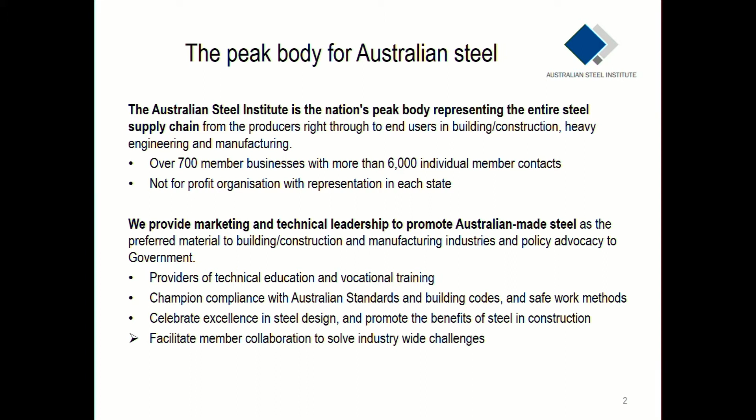Under normal circumstances, this is very difficult because the provisions of our anti-competition laws mean that competitors can't really come together and pool resources, but that's what we're in a position to do. I'll probably state the obvious here, but steel's a very important material. Steel, due to its fundamental physical properties, is a very versatile material, and it is used in, or fundamental to, most aspects of our modern society and the economy that supports it.

This applies both to long-standing traditional industries such as building and construction, and also to more recent industries such as renewable energy generation. Think of wind towers, turbines, frames and support structures for solar panels, and even platforms for wave power generation.

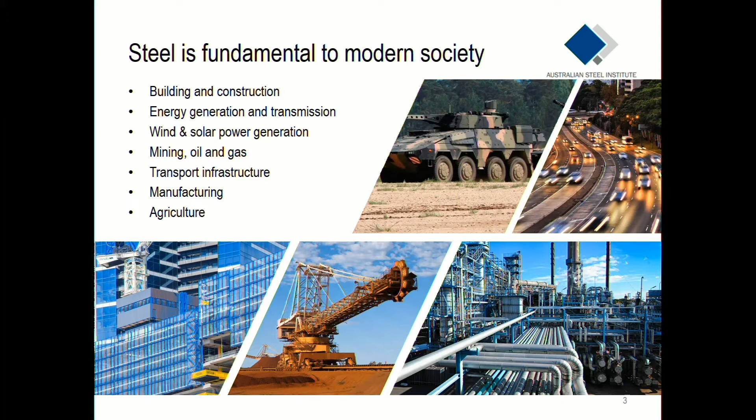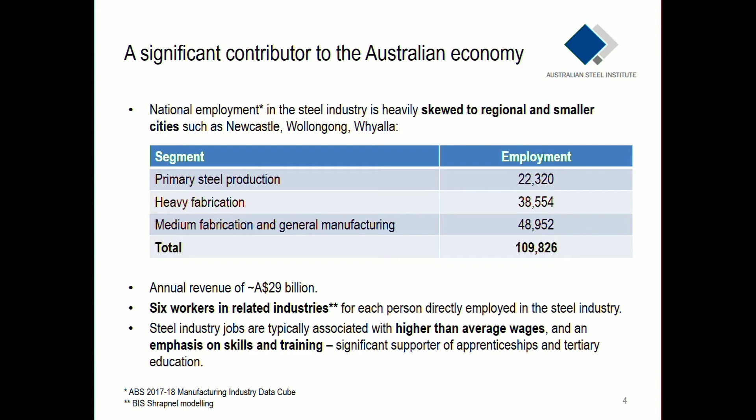In recent years, despite extensive industry restructuring and some very high-profile business transformations over the last decade, domestic steel production and the associated downstream industries remain a significant contributor to the Australian economy. The steel industry is also noteworthy in terms of having a high proportion of jobs and businesses located in regional areas or non-capital cities, where unemployment is typically higher than the national average. The industry is technically complex and requires a highly skilled workforce to support it, which in turn encourages the ongoing presence of high-quality tertiary education institutions in regional areas, all of which are good things.

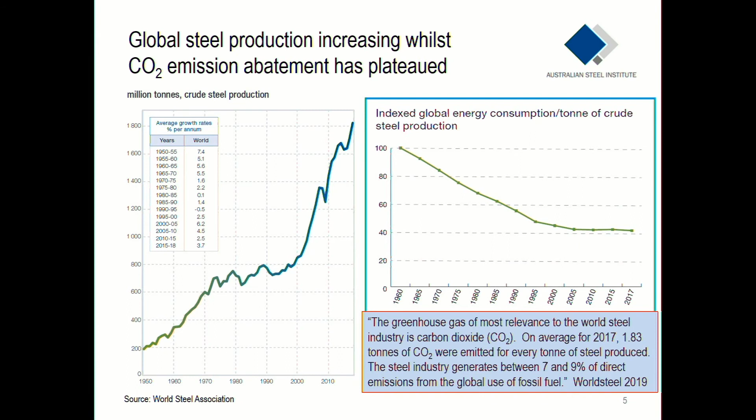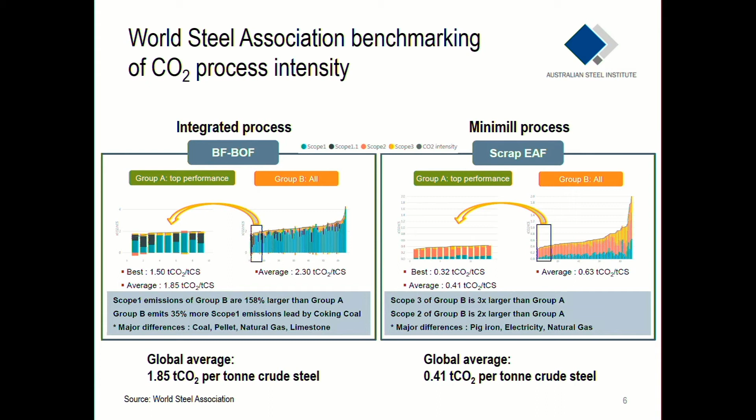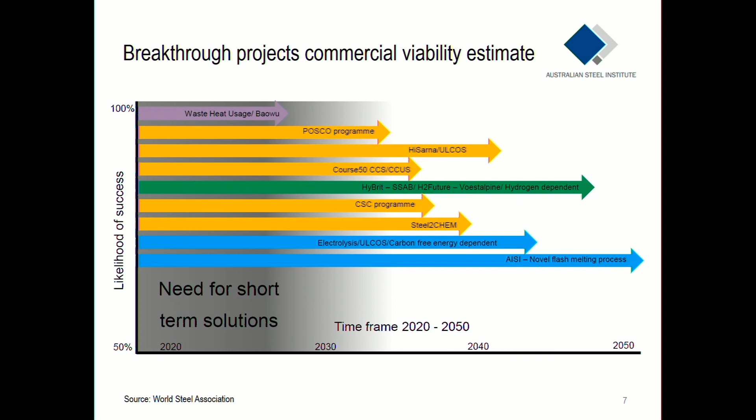I won't comment on the individual plans and initiatives of our producer members to reduce CO2 emissions, other than to observe that all are actively engaged in the need for CO2 emission reduction and working on a range of incremental measures.

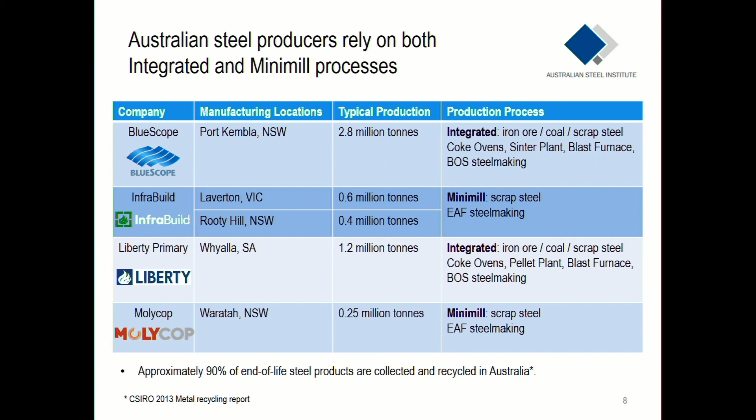So, to summarise, the transition to zero carbon emission steel production is expected to take multiple decades before fully commercial processes are proven at industrial scale. This transition will require very significant capital investment on the part of producers, set against a background of significant technical risk and complex technology development challenges. This task is well beyond individual steel producers to achieve when you consider that total Australian steel production accounts for less than 0.3% of global steel production.

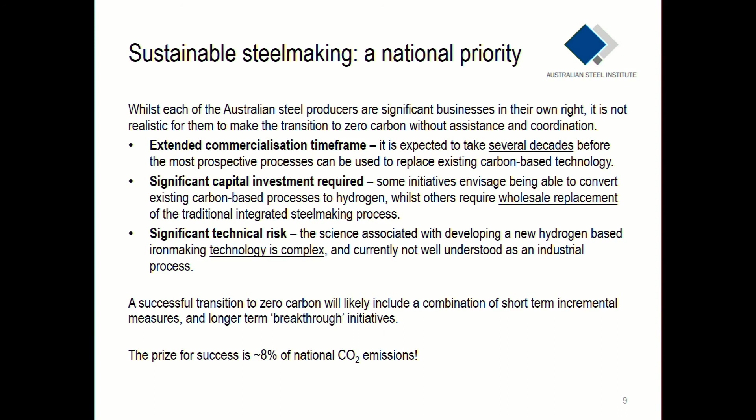Therefore, the Australian Steel Institute believes that the best chance of success lies in coordination of local producers to pool resources for the transition to breakthrough zero carbon technologies. Although Australian steel is relatively insignificant in global terms, it does constitute roughly 8% of national emissions, concentrated at a small number of sites and businesses. So it's very worthy of prioritisation because of the impact we can make just in one industry.

And finally, my final comments, I guess: underpinning this necessary transition is the need for policy settings that provide confidence for industry to make long-term investments and commitments. Included amongst the policy settings is the need for a level playing field, whereby all the steel used in Australia, regardless of where it is sourced, is subject to the same sustainability criteria, particularly as regards CO2 emission intensity.